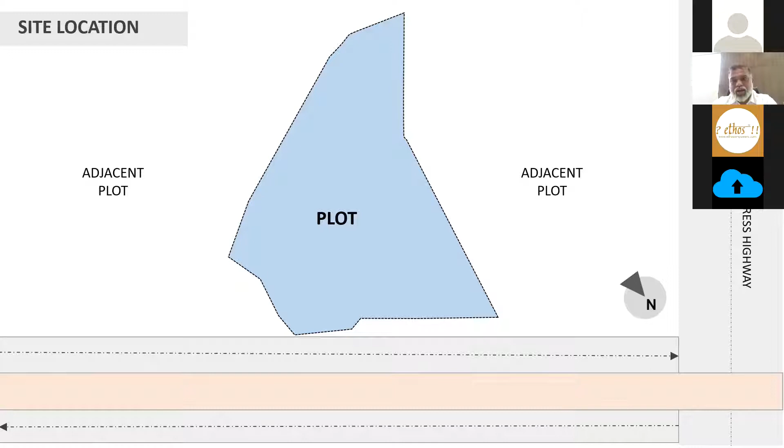Now comes the zoning and massing of the building. You can see the 6-meter open space left from the plot boundary for a fire tender. At the rear end of the plot, which is a very odd shaped plot, we have put the ramp for vehicular access to the basement and the podium parking, with the service core which housed the fire staircase as well as 3 lifts.

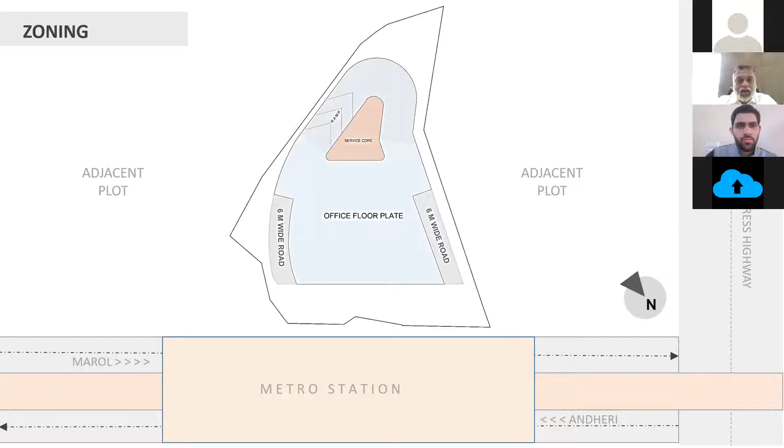And then remaining is an office floor plate. On the ground floor, there is a retail which is planned. Now, due to the metro station, we have around 6 meter to 7.5 meters height on the Marol and Andheri link road, and above that another 15 meters is the metro station. So due to such a height, the entire face of the project is blocked.

If you travel on the Andheri Marol link road, you will not notice that such a huge project, such a high-rise office building, is coming up there, because there are adjacent plots which also have retail, so it just merges into the other projects. That was actually a challenge for us - such an office building is coming up and it is not seen basically from the link road.

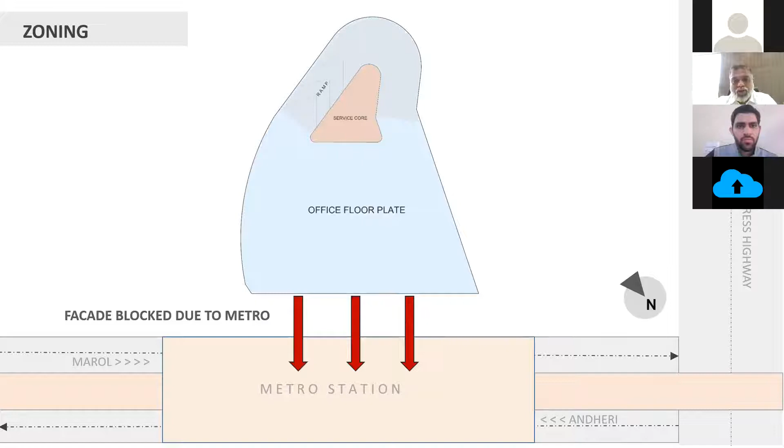So what we did is we carved out a triangular atrium. We cut the office floor plate, and on that atrium at the 3rd floor level, we housed an entire food court or restaurant. Above floors, we have the office buildings or offices. You can see the offices with the 3 lifts and a fire staircase housed there.

So the atrium is carved out and the building facade is turned at an angle towards the Western Express Highway. Suddenly the building facade becomes this chamfered portion, which you can see from the junction of the Western Express Highway. I have the existing pictures, which I'll share, and you will see how the effect has come up.

So what we decided is let's give form to this shape rather than just have a chamfered facade. We thought of having a diamond formed. This triangle actually starts increasing from the 3rd podium to the 9th level, and from the 9th level to the 14th level it starts decreasing. Thus, it forms the diamond shape.

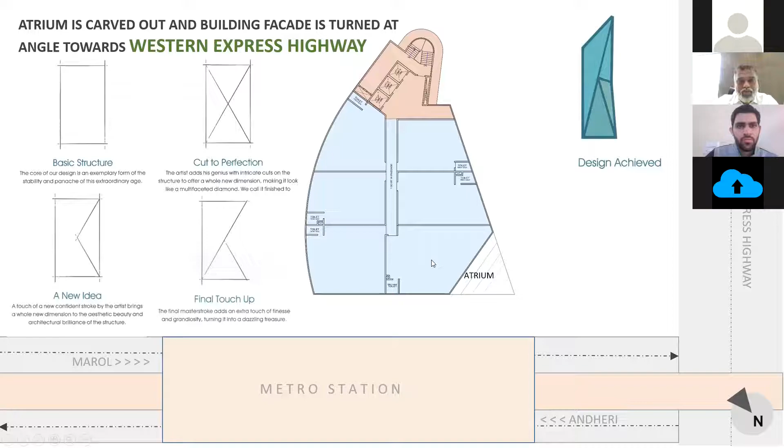You can see the design achieved in this sketch, which is actually a very early concept sketch, a Google SketchUp of the massing. We tried to do it, and you can see the metro station, which is shown like a tube here, is not there in this sketch — it actually went up and became a massive structure that completely blocked the facade. It's not like what you see right now with the tube.

So located opposite the metro station, the front facade was getting blocked, compromising the frontage of the building. To overcome this, we turned the entire face diagonally, thus creating a diamond shape and opening it onto the Western Express Highway. The architecture of the building allows a prestigious view of the cityscape and the highway.

The structure is designed with a complete glass facade to ensure ample natural light, helping save power and reduce daytime electricity consumption. Passive planning techniques are used to make the building energy efficient. The services and circulation cores in the building make up the tapering south facade, which I showed earlier. The north, east, and west facades are glazed and designed to be self-shading facades.

So this is an office building, and people wanted a glass facade — the client wanted a glass facade. Since it's also adjacent to other buildings, we wanted to have a glass facade to give a more open feel.

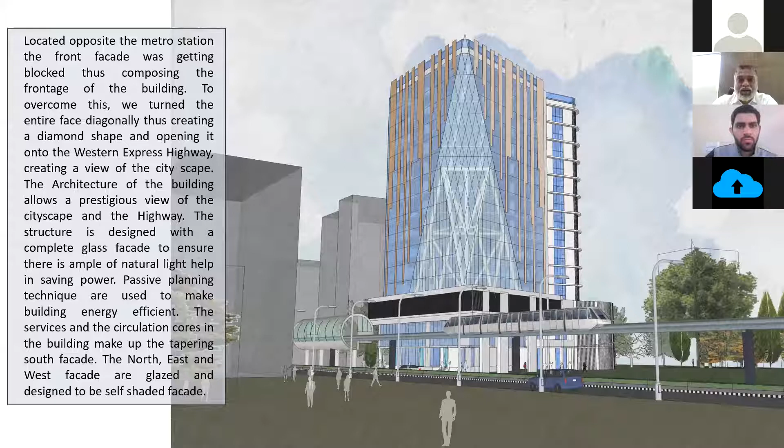So there is no heat gain or sunlight penetration into the building. We did a daylight analysis where you can see the north side, which is basically the face facing the metro, as well as the south, west, and east sides.

On the south facade, we don't have glazing — we have windows which are required. On the north side, we have used the SGU, single glazed unit. On the east...

The benefits in energy saving include a 4.4% reduction in annual energy use and a 10.1% reduction in annual cooling energy use.

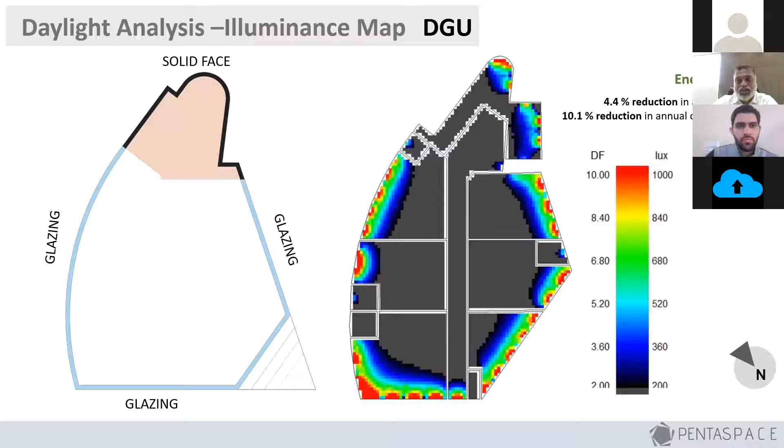Also, these are certain aspects we selected — around 8 to 10 glasses — and each glass we put through tests of minimum illumination and maximum illumination, as well as the daylight factor and uniformity ratio. So we used enhanced oceanic blue plus SGU, and another option was enhanced oceanic blue plus DGU.

So on analyzing the climatic discomfort issues and energy factors, we recommended these to the clients, and they appreciated the entire study and went ahead with these glasses.

So basically, lower U value helps in providing better insulation from harmful radiation and discomfort due to heat during summers. Lower VLT, which is visible light transmission, helps in cutting excessive daylight causing glare and visual discomfort. Lower SHGC helps in reducing cooling energy bills by reducing external heat gains, which in turn reduces the consumption of air conditioning.

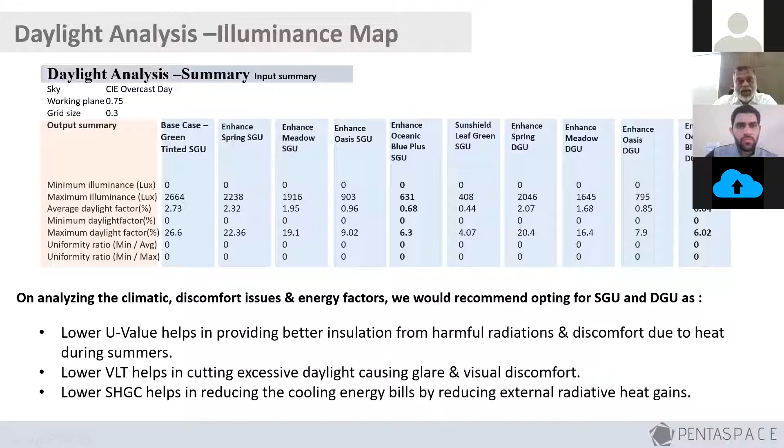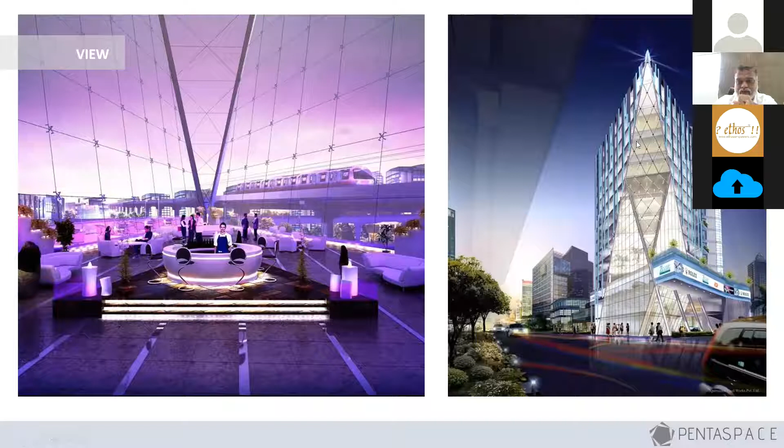So now all these offices are actually connected to the road, at the junction of Andheri Marol Link Road and Western Express Highway. This is from a street level, you can see it. You can see the diamond there.

So definitely I would like to share once the final building is over, the final images.

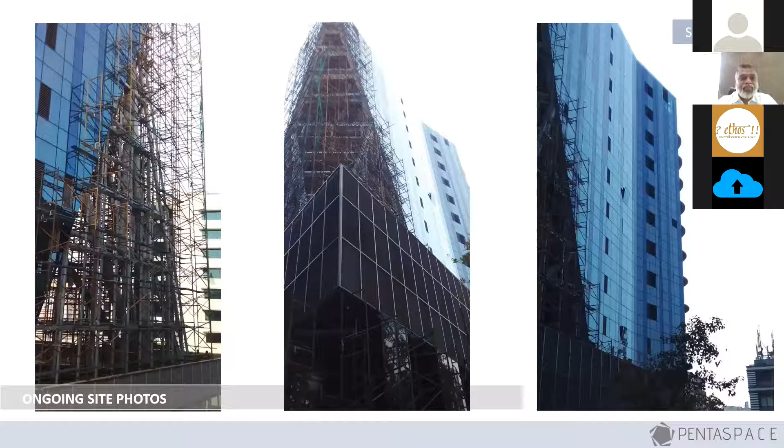Let's get on with the next project, which is the Zishan project. It's a mixed-use building. This project has a bit of a history.

It's a redevelopment project, located in the suburb of Mumbai called Vile Parle East. Earlier on this plot, there was a theater, a single screen theater, which we used to call Shan Theater. It was built in the 1960s.

So it got dilapidated and then it came up for redevelopment. What happens in the redevelopment of a theater? You have to have screens, but from a commercial point of view, to make the project viable, you can have certain office activity going on, retail activity going on along, but you cannot get rid of the theater because it's kind of a reservation in the development plan.

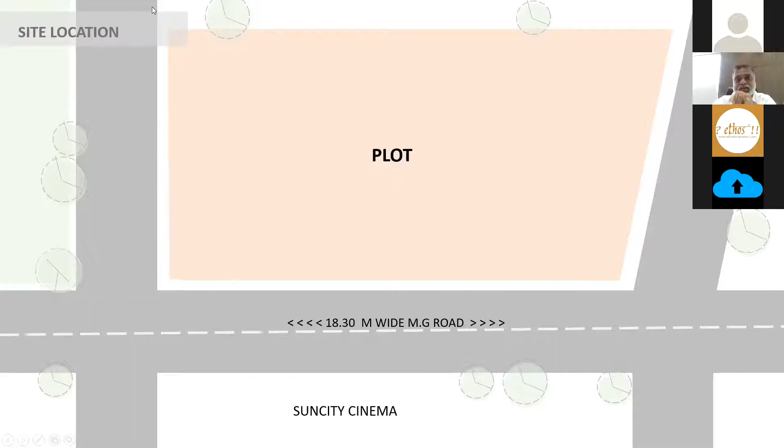On the west side, there is already an adjacent plot and buildings are there, and after those buildings, there is a suburban railway line. So this is basically about the plot.

Now, how we did the zoning: on the north side, we created a public plaza because this is for people from Vile Parle East and the JVPD scheme where all the famous Bollywood stars are staying, or other industrialists and other people, and also the Vile Parle West people. They basically, if they have to access or go to South Mumbai or North Mumbai, they have to cross this bridge from Vile Parle West to East, and either they go from this road to the highway or they go on this road more on the east side to the highway. So this junction becomes a very prominent junction.

On that junction, we wanted the building to be set back, not coming out onto the road. So we thought, let's create a good public plaza there, and from that plaza we'll have an entry to the theaters.

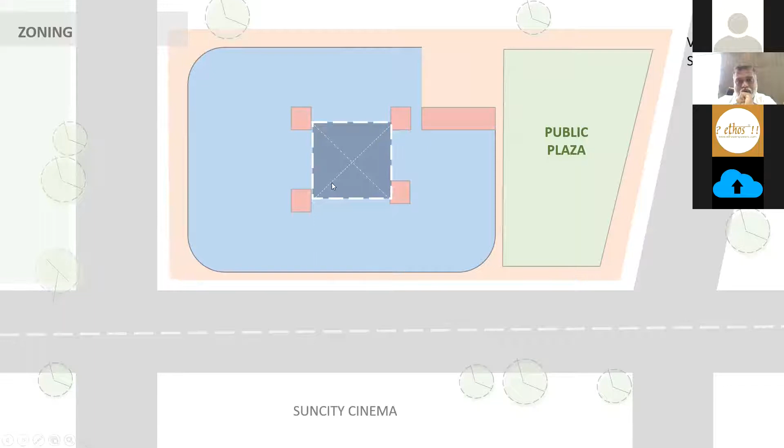We proposed two multiplexes there, with the rest of the floor plate as office space. The dark blue is the courtyard we planned, because the floor plate depth was getting bigger than 7.5 meters, so to receive more natural light into the office spaces we added a courtyard.

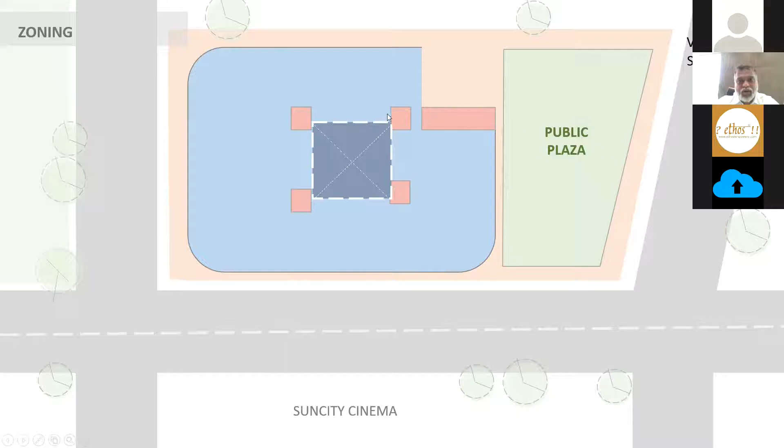There are four service cores which house the staircases and lifts, two lifts and fire staircases as per code, serving the office floor plate. This particular block is for the theater.

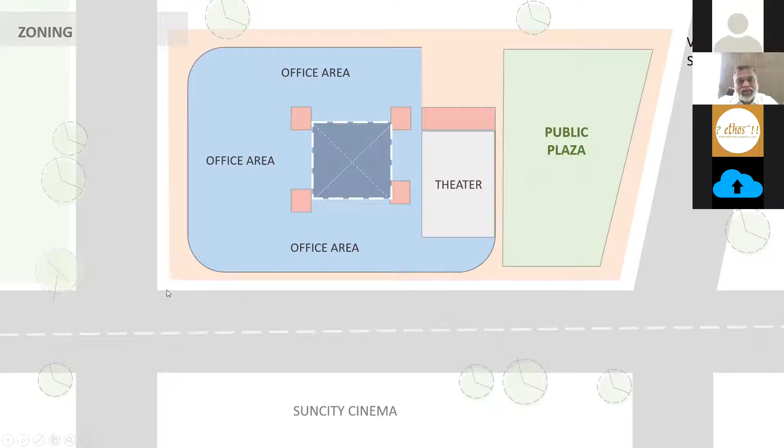The service core basically has a staircase, lifts, toilets, and the AHU. So all the services are planned here and the theater is here. On this wall, all the hoardings and advertisements can come up, facing the public plaza. From the public plaza you can access the theater, and from these roads you can access the retail at the ground floor and the office area above.

This block falls into the zone of the airport, the Vile Parle international airport of Mumbai. This plot falls into the funnel of air traffic movement, so there is a height restriction and we couldn't go high.

So we had to use the entire maximum ground coverage, except for removing the public plaza. You can see the toilets are planned on the external faces, because internally we had the courtyard.

We thought it was going to be another glass building, so how could we bring a sustainable factor into it? We thought of a double-skin architecture, adding glazing. Basically the glass is floor-to-floor glass, and on the face of the duct there are fins which also act as shading devices.

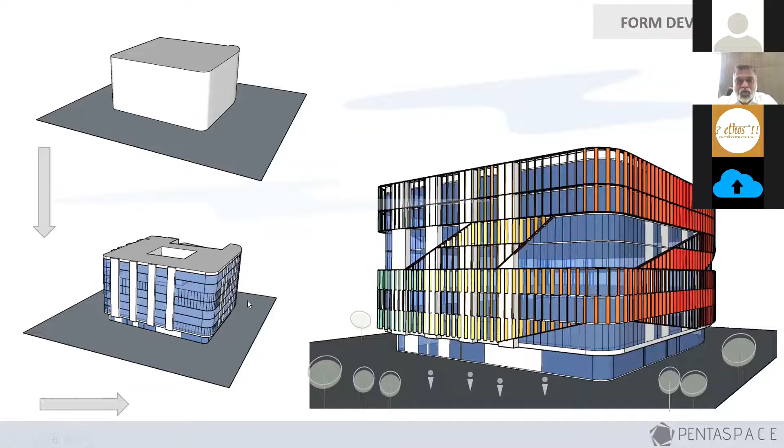Let me show you the floor plan. This is a typical floor plan where you can see the theater with its own services, the offices, the internal courtyard, and the four cores.

On the periphery, these are the aluminum fins we have. Wherever the services are located, we have reduced the distance between them.

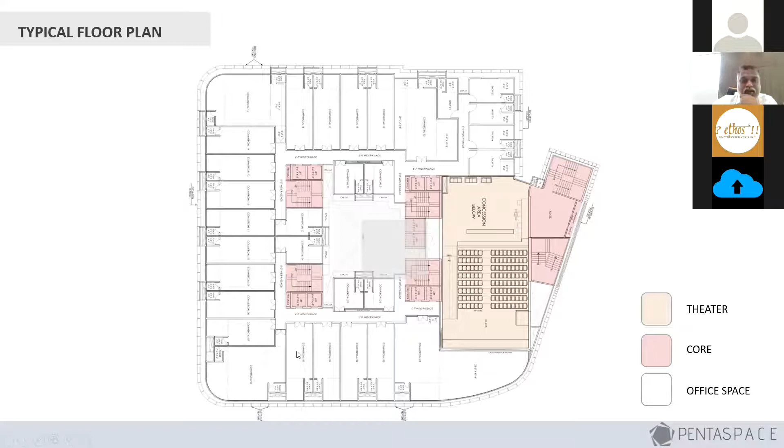We thought, rather than having only vertical fins perpendicular to the glazing, let's create some dynamism in the elevation. So we decided to rotate each fin 5 degrees. You can see here the fin is in line with the division, then the fins slightly start moving 5 degrees, and that's how it appears in the elevation.

These fins are just 50mm, but in depth they are actually 1.5 feet. In the SketchUp models too, they're not just vertical fins but create dynamism in the elevation.

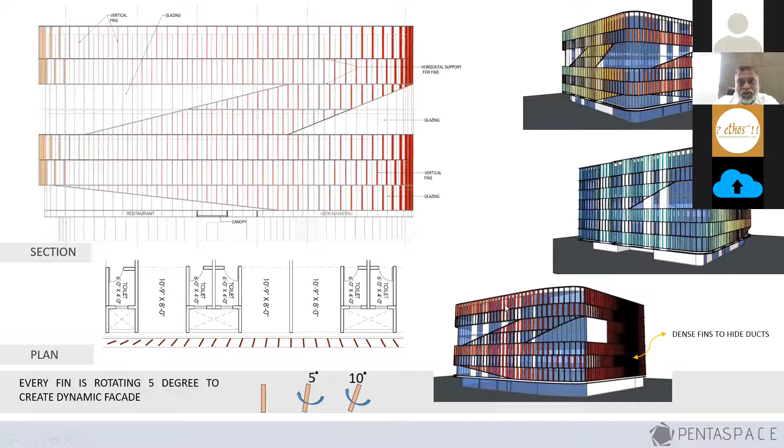These are the renders of the internal courtyard. That's the entrance lobby — you have a lobby, coffee shops, restaurants. This becomes a hangout space for the offices above.

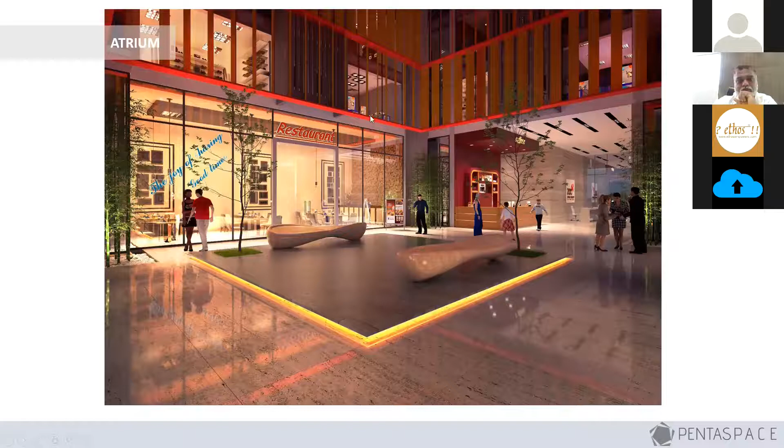That's the render from the junction, and this is the plaza. You have a box office there with an entrance towards the theater. On the ground floor you can see the retail, and above it's all office buildings.

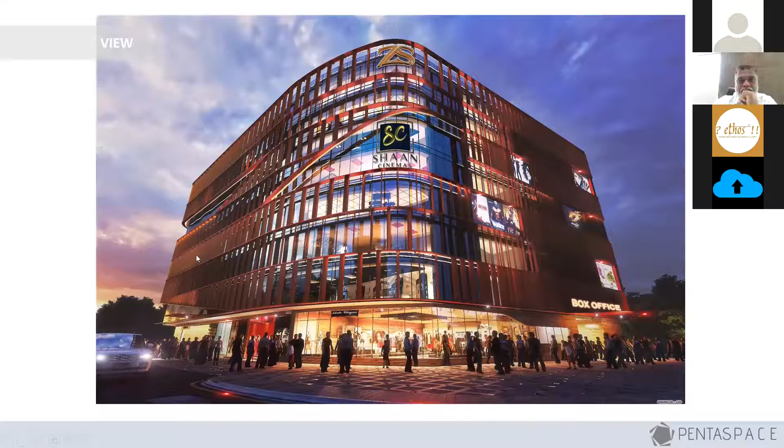On the roof we have planned a roof terrace garden, which becomes a breakout space for all the offices below. During lunchtime or free time, they can access this terrace and take a break from their hectic schedule or meetings.

There are certain places we've planned where people can have outdoor meetings, bringing their clients or guests to the top, creating a different environment. We are also planning certain play areas there.

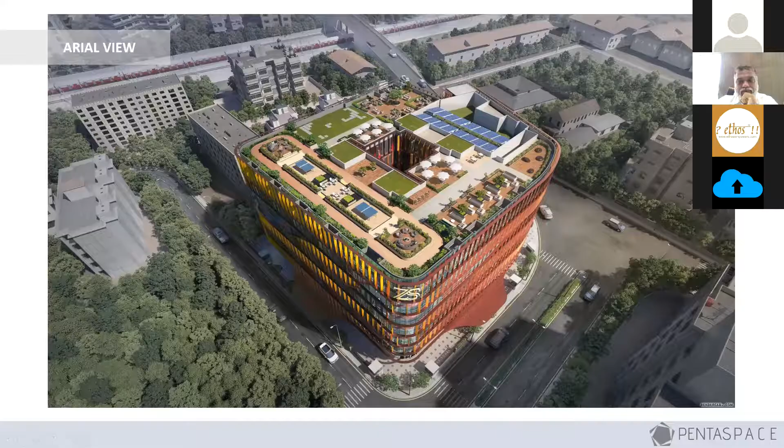That was about the Zishan project. Let's move on to the third project, which is Sanjona Chambers.

This is again an office building, a very small boutique office building, not a big floor plate — just 2,000 square feet per floor plate. It's a high-rise, or rather mid-rise, office building in the suburb of Mumbai called Chembur.

Again, you can see it's a very rectangular plot with a minimum depth. The length is more along the road, an adjoining road which goes to the back properties. On all three other sides, it has adjacent plots.

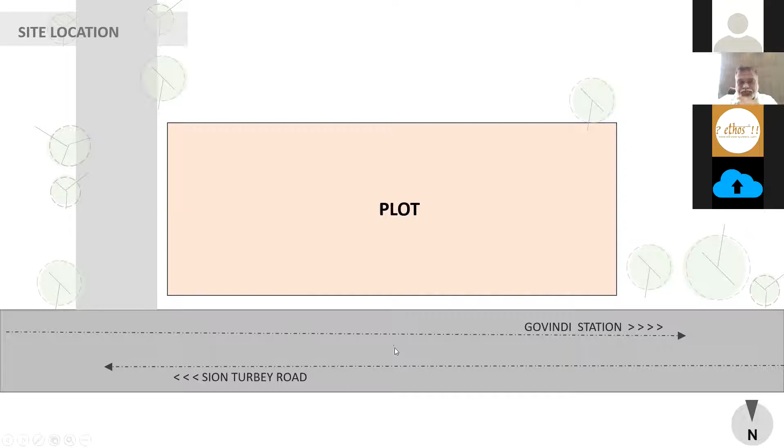So in the zoning, you could see the face of the building, which when we visited the site, we immediately thought this is the best thing this plot could have, which is more surface area facing the north.

So the immediate thought and planning was to put services, which are used for keeping your outdoor air handling units, and the service core, which is the fire staircase and the lift, planned on the south facade, so the south glare is avoided.

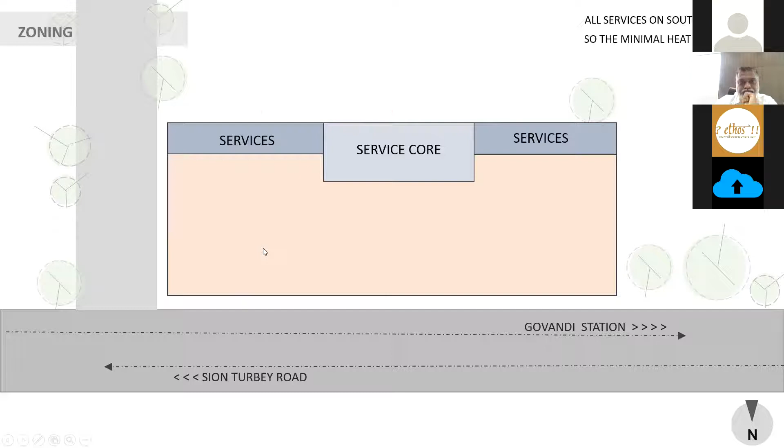That's the office space. On the east and west side, we have planned the windows, and on the north side, the entire face is glazing. So it's a very simple plan, very simple solutions, and apt for the building.

This is right out of college. We had this knowledge, and just basic knowledge applied to a basic project.

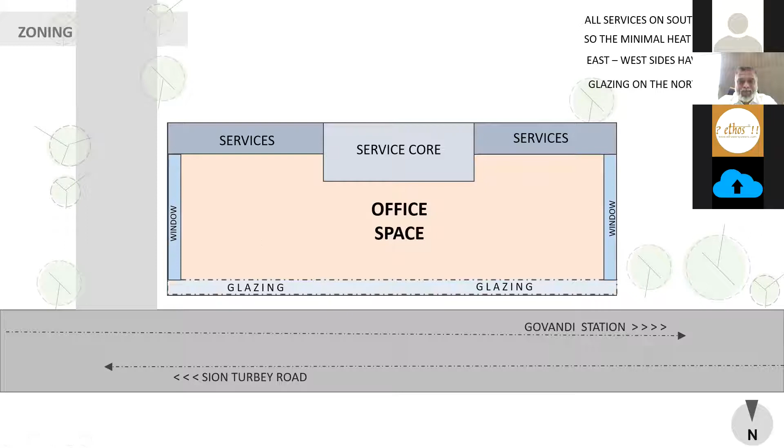So that's the floor plan. You can see the two lifts, a fire staircase. On the south side, we have kept this ledge for keeping outdoor air handling units. On the west and east side, we have planned the windows, and on the north side, all glazing.

So this is peculiar. This floor plate can have like one office, or it can divide into max two offices. But actually, right now it's sold as one office per floor.

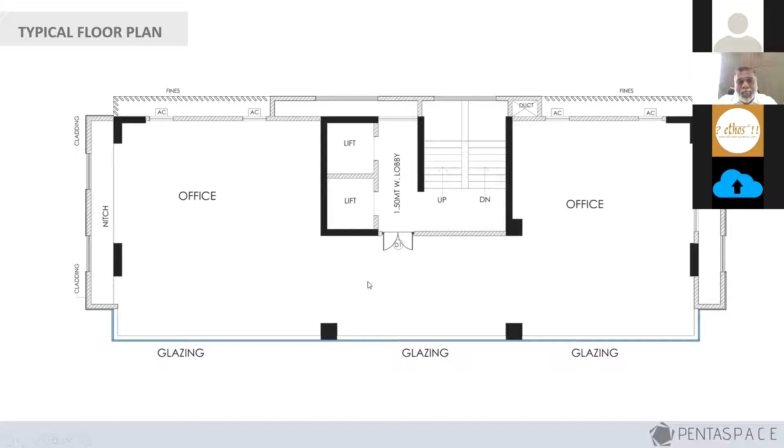That was all about it. It was a very basic project, but basic knowledge applied at a small scale office building project. The next is a residential project. It's called Astoria, in another suburb of Mumbai called Goregaon.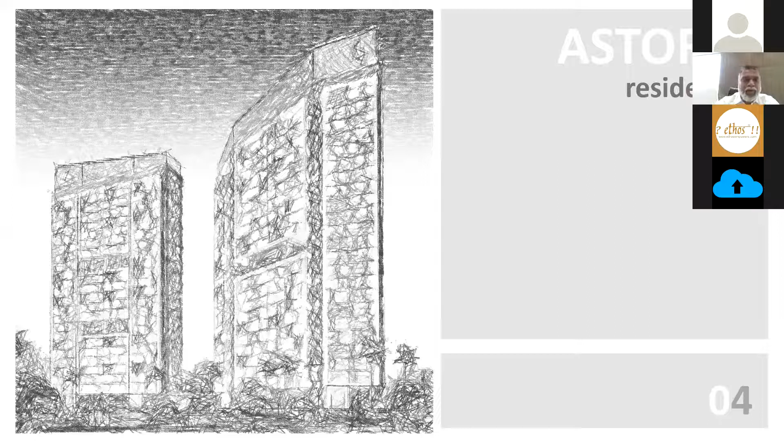These are high-rise buildings, stilt plus 22 floors. This is the odd shape of the plot again. It is actually adjacent to the Mithi River, and after the Mithi River there's the Aarey forest or Aarey green space. So the length of the project is actually facing the Aarey.

And the backside has a public garden which actually expands more. So you can see the plot is odd shaped, but it is surrounded by very beautiful outdoor vistas. So what we did is, due to this, and the plot size is also bigger.

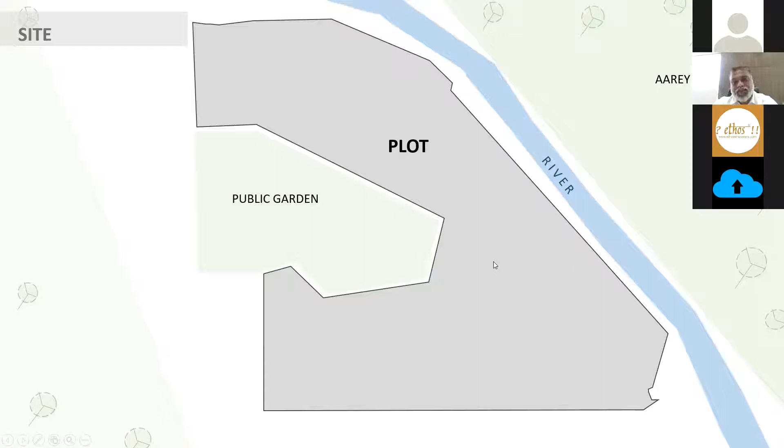So when you have plot size exceeding a certain square meters, you have to start giving amenities to the people. So these are the amenity plots which we carved out, and we thought let's put the offset. What we did is we just offset the 6-meter road, because sometimes these roads are used to clean up the river.

I mean, actually at this junction, at least it's a river. As it moves forward, it becomes like a drain, so it's not any longer a river. But at this junction, because it's very near the origin of the river, it still requires cleaning and getting rid of the silt.

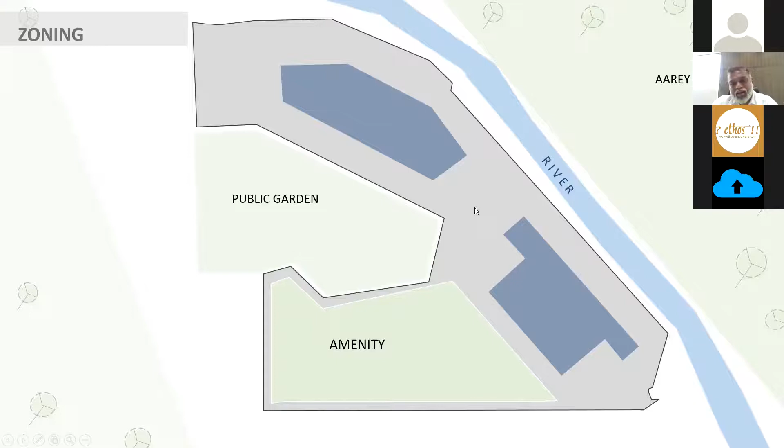We have to leave the access there, so we just offset the boundary and got the floor plate. And we said, okay, let's have an amenity plot here where one can plan amenities for the citizens of Mumbai—it can be a garden, a school, or a hospital. The rest is all the RG area, recreational ground on the Mother Earth. And these are the shapes of the buildings we got.

This is a 9-meter wide driveway which we have, and it also connects to the further two adjacent plots ahead.

Now definitely these apartments have a view towards the Aarey, and the back apartments have a view towards the RG area, or the amenity area, or the public garden area. So if this becomes an RG, this will become like one entire big RG here—this plot also.

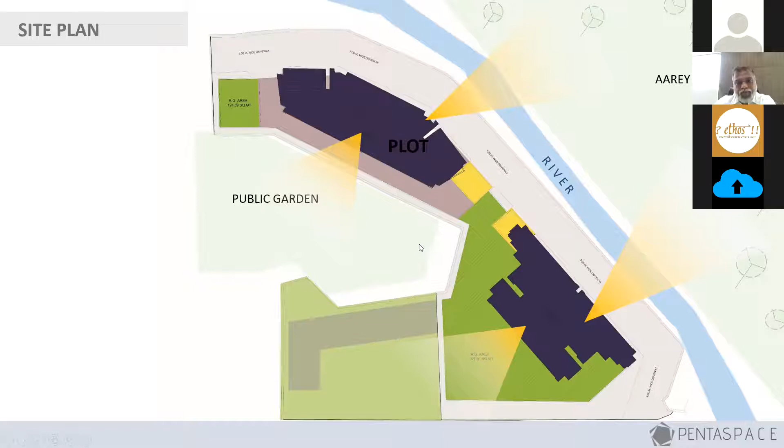So what we thought is that in a regular planning, what we have is a living room, a kitchen, and a dining area. This is called an L-shaped living dining plan. In Mumbai, people plan the width of a living room depending upon the flat size. If it's a 1-bedroom hall kitchen, they usually give not more than 3 meters. If it's a 3-bedroom hall kitchen, the width becomes 11 to 12 feet, which is 3.35 to 3.65 meters.

But even with that, your vision towards the Aarey is only 10 feet. So if I'm purchasing a residential apartment, even if it's facing the Aarey colony or Aarey greens, I'm going to have a very restricted view through essentially a 3-meter width of a window.

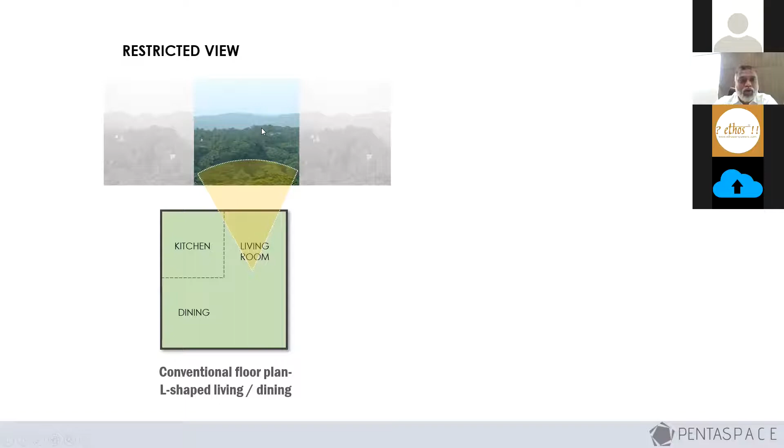So what we thought is, let's have a horizontal plan, where the dining also comes up into the kitchen space and the kitchen moves ahead, so we get a panoramic view of Aarey greens. This is about breaking the conventional monotony in designing a plan that gives an unobstructed view of the lush greens as well as maximizes light and ventilation.

So even if the depth of the apartment is less, the apartment looks very roomy, it is well lit with natural light, and it just feels fresh. You also have a larger window, which lets a breeze come inside the house.

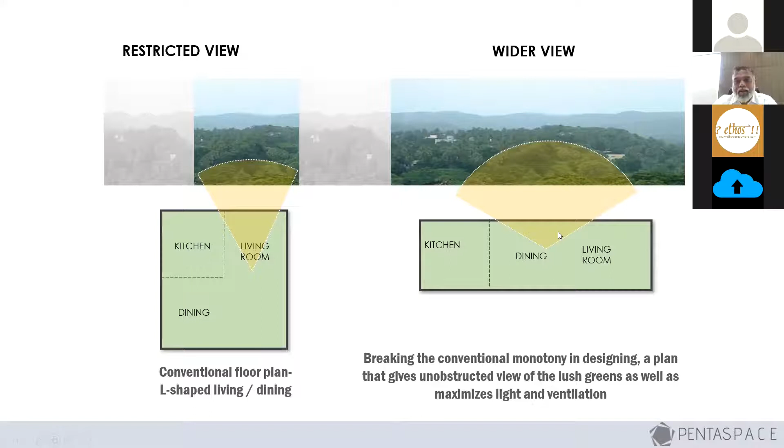So you can see this is the A tower, where these are all 1-bedroom hall kitchen flats planned with a horizontal kitchen, and even the bedrooms are placed in a horizontal way. Then there are toilets — there are no toilets that come into the front face of the building. They are all tucked in at the back, in the internal chowk area.

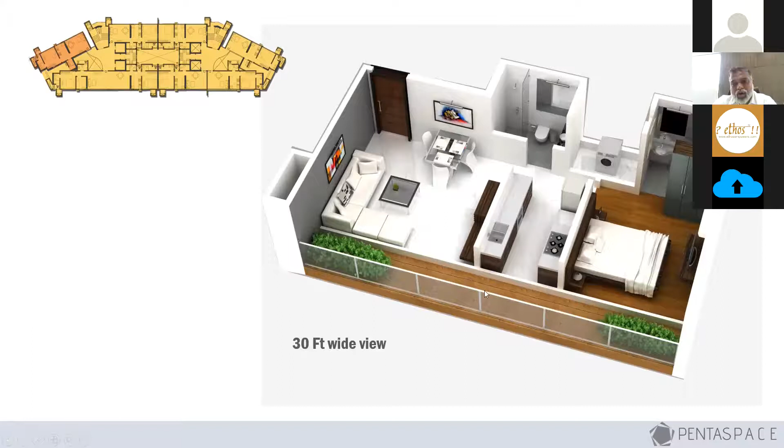So I'm not wasting my view or my balcony view of the flat towards the Aarey greens. Even that 1.2 to 1.5 meter width of a toilet is not wasted in the elevation.

So this is basically what we mean by sustainability — sustainability in the planning stage can also be achieved. If you can just be sensitive enough to the surroundings where you're planning or developing the structure or project, you can apply what I'd call common sense, and the results are there.

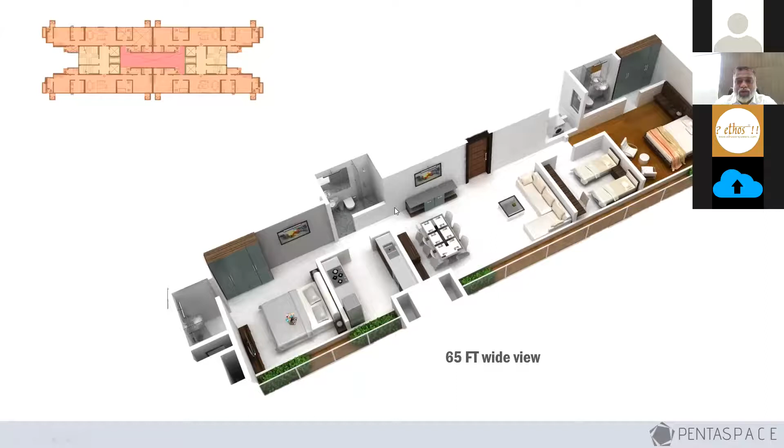A residential building aligned to allow an unobstructed view of the vast green expanse of Aarey colony from the entire flat or apartment challenges the accepted norms for a home. All rooms are designed to have a larger dimension opening onto a continuous deck. The openings along the longitudinal side of the house optimize cross ventilation and natural light, achieving a sustainable home.

So, reinventing a few dimensions in the planning of the apartment, when we have such a huge deck, since it is facing the east side, we thought of having some kind of sunshade devices. On the balcony edge, we planned movable sun shading devices, which are basically aluminum jalis or louvre panels.

So they are all aluminum louvered movable panels. If I'm sitting in the living room in the afternoon, say 12 or 1 o'clock, and I'm getting a lot of sunlight which is bothering me, I can have these movable panels arranged in front of the living room. When I'm in the bedroom, I can arrange all these panels in the bedroom. So basically these movable panels reduce the sunlight penetrating inside the house.

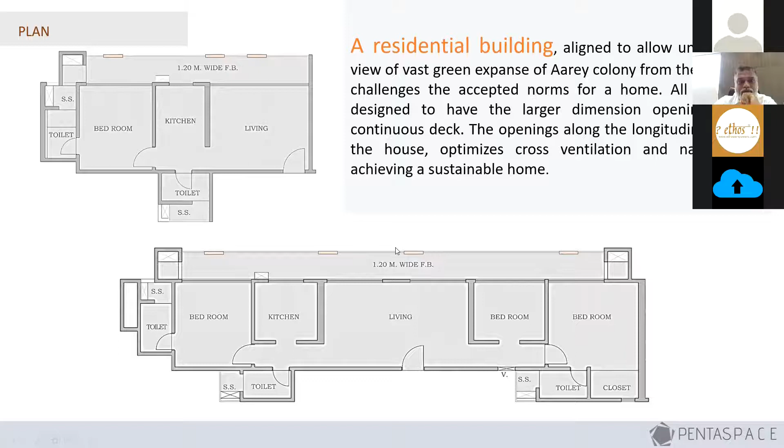So let's see, you can see one of the blocks, this dark blue color. Another thing we achieved by doing this is, since all the apartments will be using different spaces, these panels are movable and will be moved according to the use of a space or user of a space. So the elevation will be ever-changing, these panels moving all the time throughout the day, creating a dynamic elevation throughout the entire day and year, simply by movable panels.

That's all about it. And who's creating the dynamism in the elevation? It's actually the user of the space, being functional and adding some creativity, you can have all the parameters and elements you want to highlight in an architectural project get clicks. We didn't need to have just a simple elevation, but certain elements make it dynamic. So that's a very simple thought we gave.

So the fins allow the movement on the facade, which will change the elevation from time to time, creating a dynamic play of light and shadow inside also. So from the outside aesthetic point of view, to the inside, a play of light and shadow gets achieved.

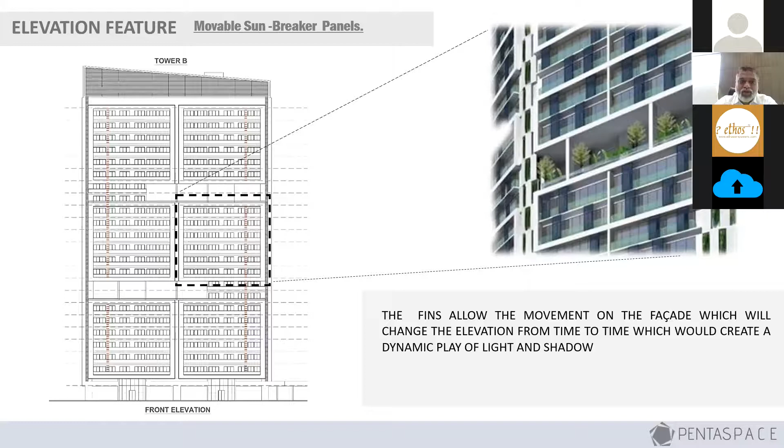So this is a render again. I'm sorry, I just couldn't find the pictures, so I'm not able to share actually. And also this is a silver rated project.

On the staircase also, if you can see, we have planned a zigzag pattern where we have a solid and glass and vertical landscape planned there. These are the refuge areas, double height refuge areas, which become entertainment areas, indoor play areas, that kind of thing.

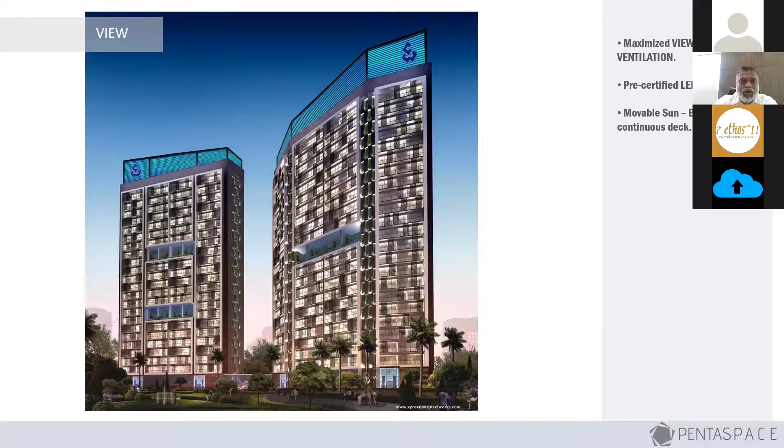Now this is another residential project which we would like to talk about. Again, this is a very boutique, very small project. It's one apartment per floor, a four bedroom hall kitchen apartment, 500 square meter plot, but it's just planned in a different way, so I thought I could share it. From the large scale residential building to even the smaller plot, we need to pay attention to detail and how we could achieve the result. That's what I'm going to talk about in this project.

So this is basically a square rectangle plot, having a main road on the east face, with north, south and west faces too. You can see roads on the north side and on the west side. Basically this plot is part of a housing society, so obviously this plot earlier had ground plus two bungalows, and this is basically the main entrance from this main road to the housing area.

It has huge gulmohar trees, a very quiet, serene plot with quiet surroundings. This road is a little busy, so we thought rather than facing the apartment on the busy road, we'll put a blank facade on the majority of the facade seen from the road. We did a reverse here - the apartment opens out on the west facade, which is actually low rise, very calm, with very high trees, very optimal for a one flat per apartment design, because the project is in the JVPD scheme, so it's a very premium and boutique project.

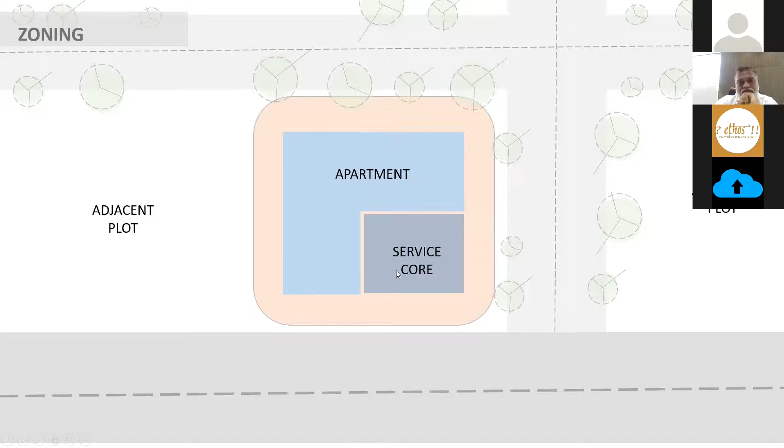So this is a service core, the L-shaped apartment, adjacent plots. This is basically the floor plan of a typical flat, where you have a staircase, two lifts, lobby, a living and dining arranged horizontally to get more light, two to three-four bedrooms, toilets, and a kitchen.

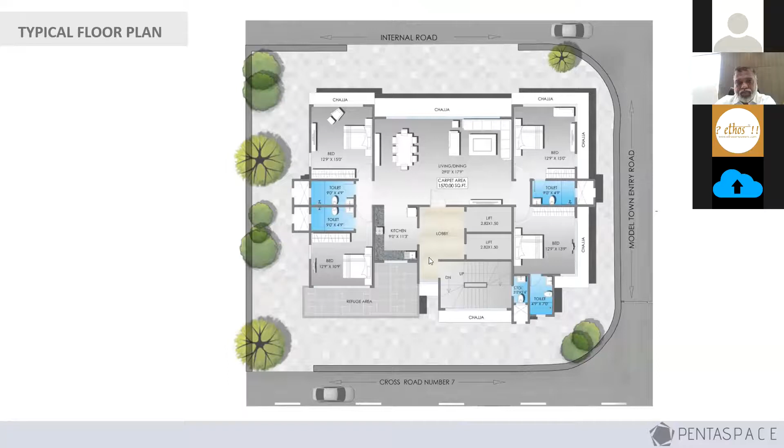The concept was that since this is a very small 500 square meter plot, we have around 7 floors, so 7 flats, but all of those flats were very big, 4 bedroom hall kitchen. We thought of at least having 3 car parking per flat. So to house that, we elevated the entire apartments by 12.5 meters.

So down below you can see there is an entrance lobby. This is a 12.5 meter high entrance lobby, done in glass with the column beam frame.

This becomes a very nice feature from the crossroad, and you can see the staircase. What we did is made a folded staircase as an elevational feature, not a waist slab staircase, which is the regular type we see. So it became a feature depicting the vertical movement in the apartment.

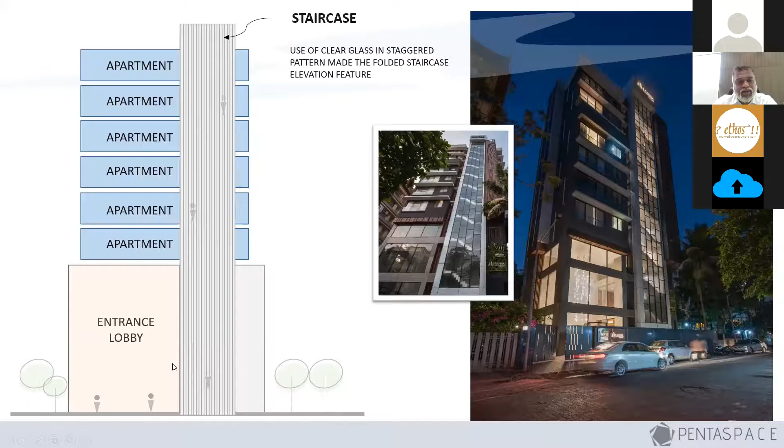The other sides have strips of vertical greens and aluminum vertical panels. The vertical greens imitate the surroundings in the building, bringing life and breaking the monotony of the aluminum fenestration. Even though earthy colors are used, it still breaks the monotony and heaviness of the fins, and these fins also allow air circulation inside.

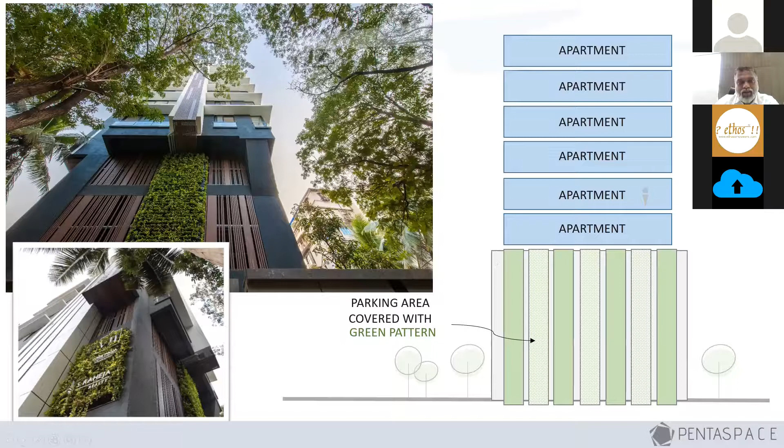This is a very stack parking system, multi-level. The car comes in and automatically parks itself. It's a very automated system used. These are the photographs.

You can see in this photograph, the vertical green beautifully imitates the surrounding. At the eye level, the apartment actually starts above it, but the building should still merge into the surrounding at eye level. That's why these vertical greens are used.

Also in the elevation, you could see this project is for S Raheja, and it's called SP7. The vertical greens also house the logo and the name of the project.

Thank you, hereby I would like to finish my presentation. I hope I did justice to my project and you like what we had done. It's a very small snippet which I could share because of limited time. Otherwise, I would have liked to share more of our projects. But that's all about me, and that's all about Pentaspace Consultant Private Limited. Hereby I would like to end my presentation. Thank you.